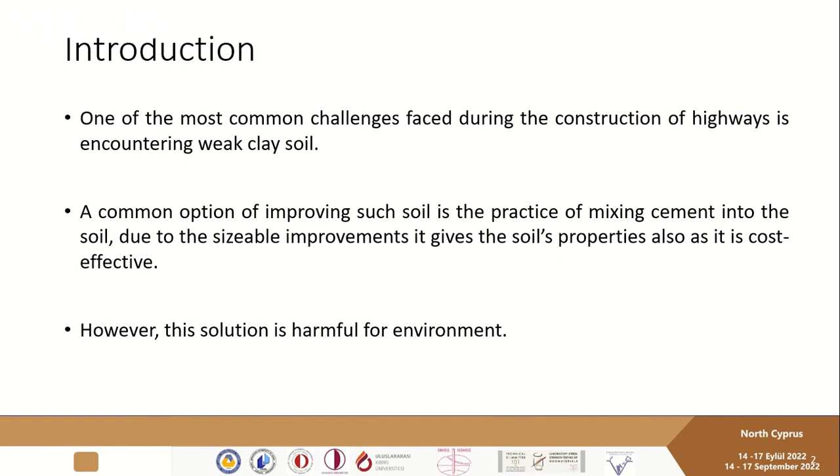However, this solution is considered harmful for the environment. Also, the most important issue that is usually forgotten is the durability of stabilized soil, where the stabilized soil gets subjected to a number of severe weather conditions throughout the seasons of the service years. These conditions may cause the stabilized soil to lose its strength.

Durability can be defined as the capability of a material to maintain stability and integrity over large periods of exposure to weathering.

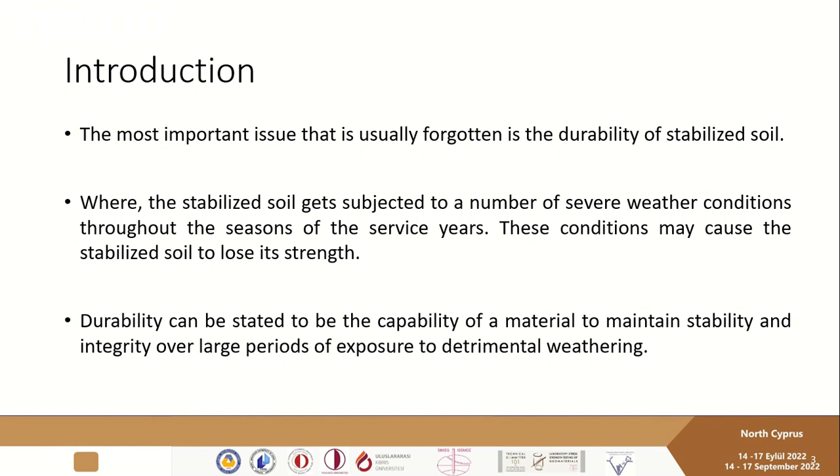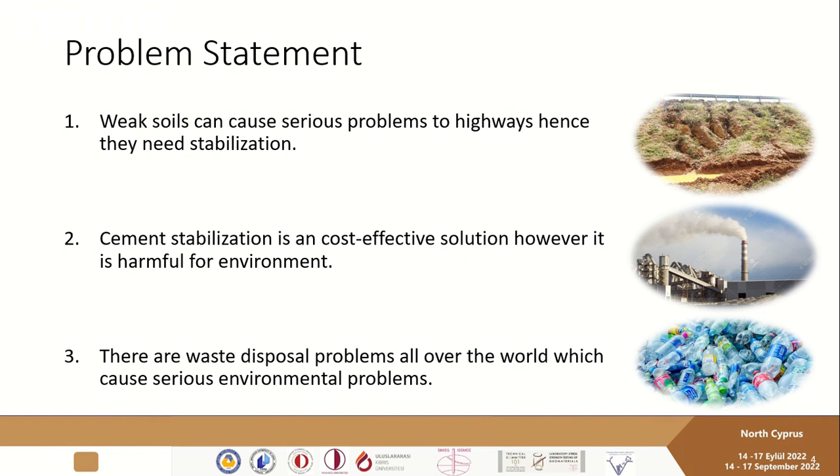So if we summarize the problems within this study, they can be as follows: weak soils can cause serious problems to highways, hence they need stabilization. Cement stabilization is a cost-effective solution, however, it is harmful for the environment. There are also waste disposal problems all over the world which cause serious environmental problems.

So the idea of this study was to combine between these problems, allowing for environmentally friendly solutions, and that is by adding PET shreds to cemented soil as a reinforcing material.

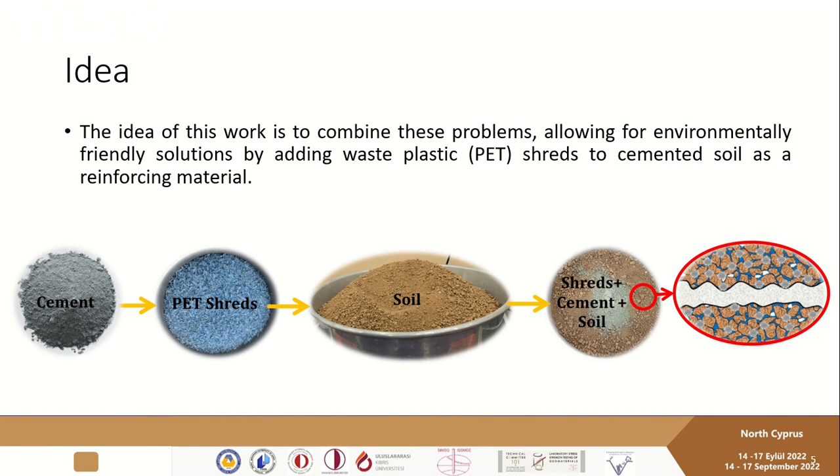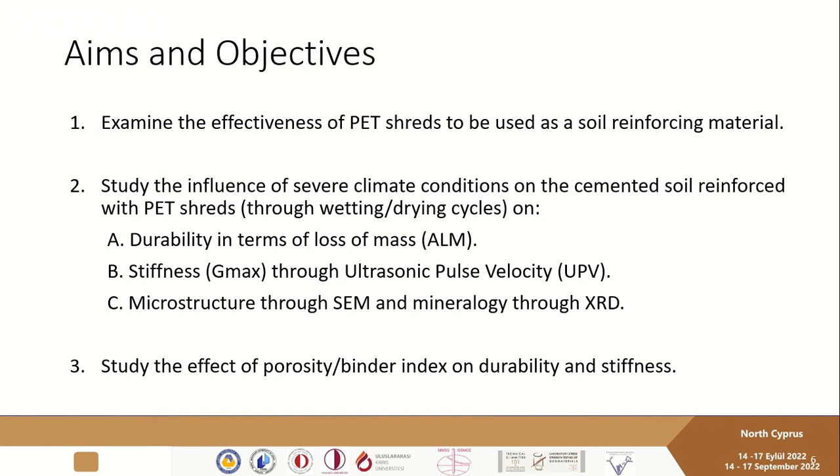The aims and objectives of this study were first to examine the effectiveness of PET shreds to be used as a soil reinforcing material, to study the influence of severe climate conditions on cemented soil reinforced with PET shreds through wetting and drying cycles on durability in terms of loss of mass, stiffness through UPV, microstructure through SEM, and mineralogy through XRD, and also to study the effect of porosity binder index on durability and stiffness.

If we come to the methodology that was followed to achieve these objectives, it was as follows: first, materials were collected. After collecting them, PET shreds were prepared and the materials collected were tested.

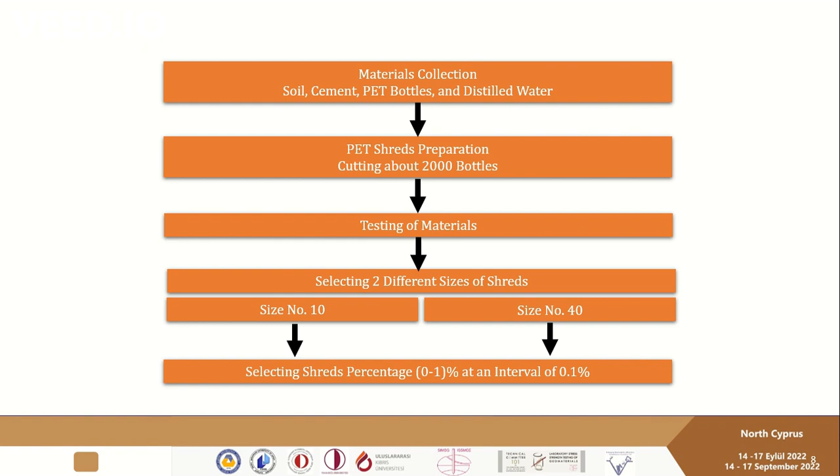After testing the materials, two different sizes of PET shreds were selected, size number 10 and size number 40. After that, the PET shreds percentage to be added to the soil was selected, ranging from 0 to 1 at an interval of 0.1%.

After that, CBR samples of soil with and without PET shreds were prepared, and then the CBR samples were tested to find the optimum PET shreds percentage range to be used to reinforce the cemented soil.

After that, three different percentages of cement were selected to be added to the soil, which were 5, 7, and 10. Then the CBR samples of cemented soil with and without PET shreds were prepared, and they were cured for 7 and 28 days.

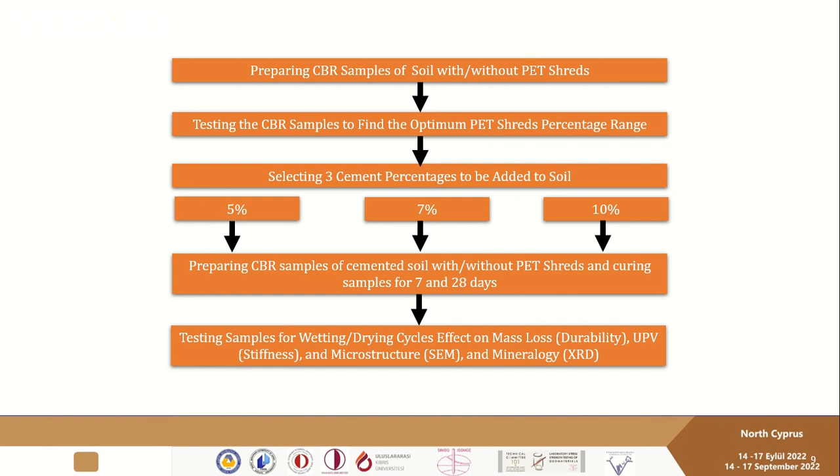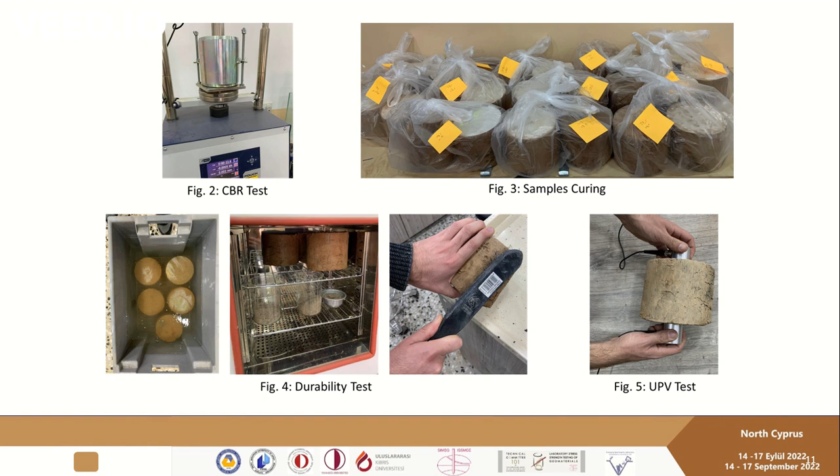If we come to the results, first of all, considering the effect of PET shreds addition to the CBR of the soil, we can see that by adding PET shreds, regarding the size and the amount added, the CBR was getting improved.

But size number 10 proved to be more effective in improving the CBR of the soil, and the optimum percentage of PET shreds was found to be 0.6, 0.7, and 0.8.

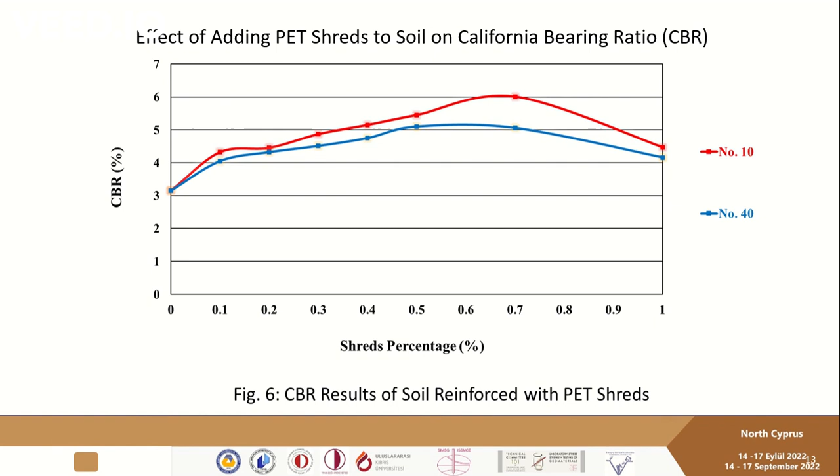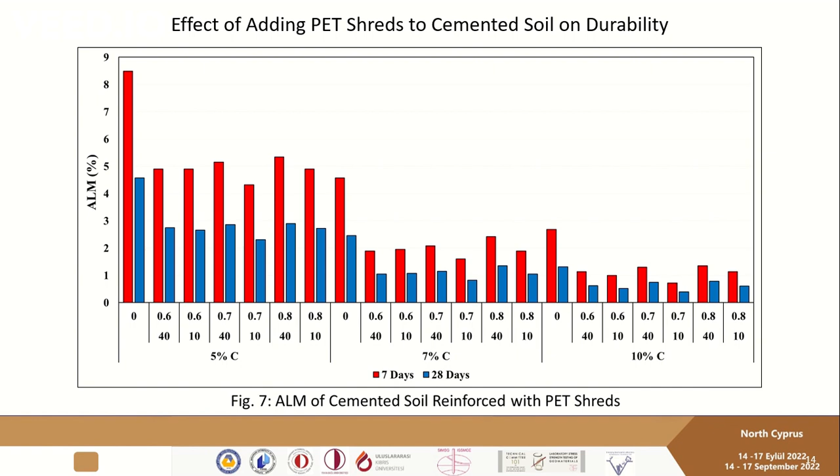If we consider the effect of adding PET shreds to cemented soil on durability, we can see that by adding PET shreds, the durability of the cemented soil was improved as the loss of mass was reduced. But size number 10 was better in improving the durability of the cemented soil, and also by adding a higher cement content, the durability was getting improved more and more.

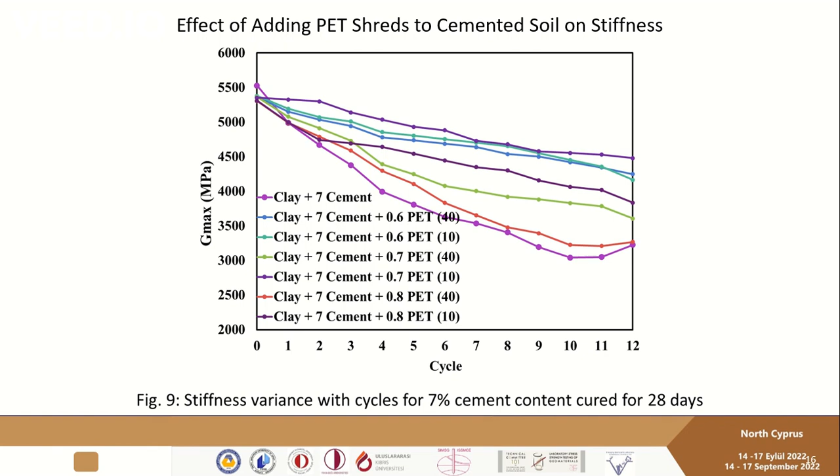However, the loss of stiffness was improved. It was reduced by adding PET shreds, which is a good thing.

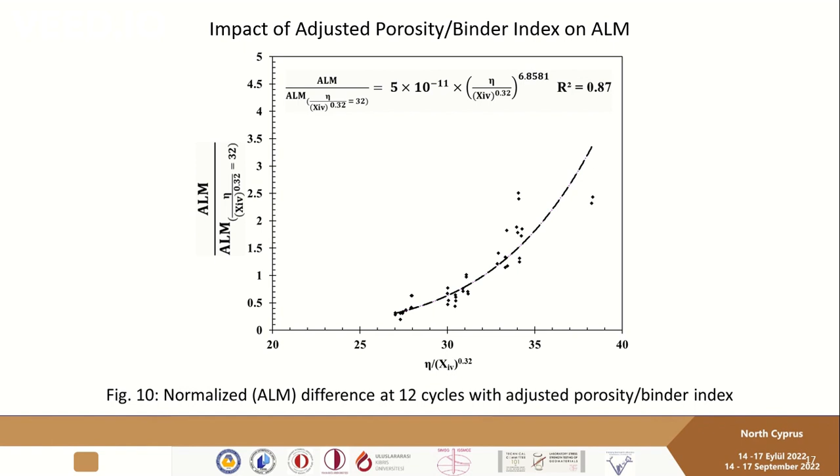Also, another important thing studied is the impact of the adjusted porosity binder index on loss of mass, where a relationship was found between this index and the loss of mass, and a high coefficient of determination was obtained. Also, the same story for stiffness, which is the maximum shear modulus.

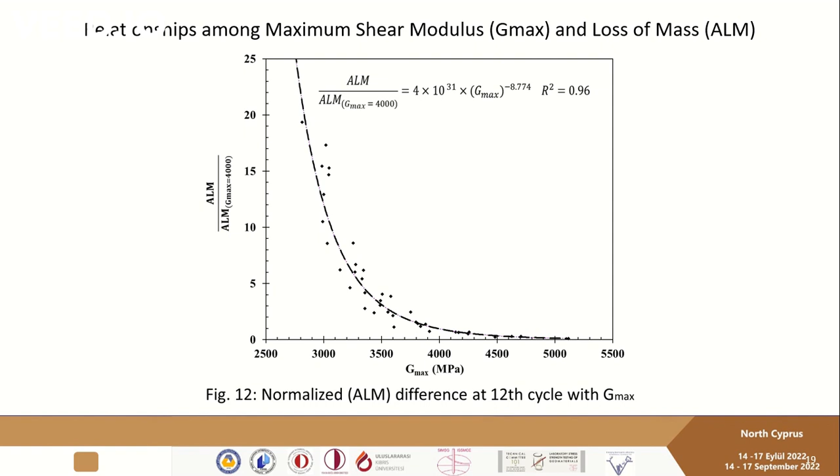Also, if we look at the relationships between shear modulus and loss of mass, we can see there is a relationship between them, and a high coefficient of determination was obtained. As the shear modulus increases, the loss of mass decreases too.

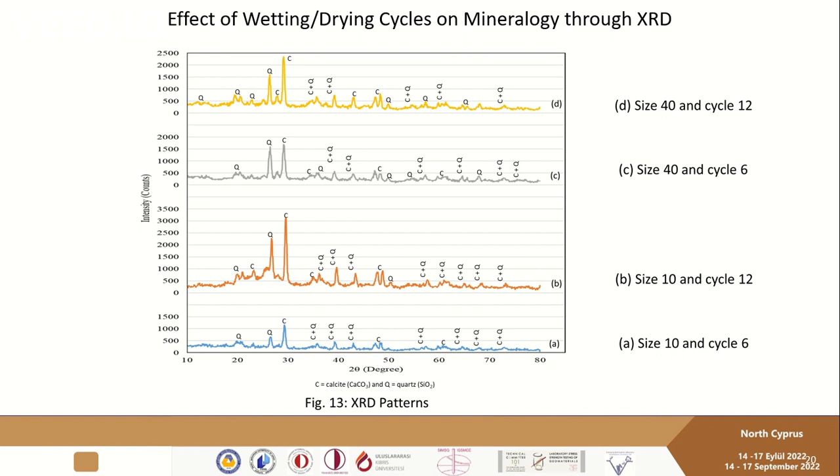Also, if we consider the effect of wetting-drying cycles on mineralogy through XRD, we can see that the main two peaks were quartz and calcite, and these peaks increased by subjecting the samples to more cycles. But these peaks were higher in the case of samples containing PET shreds of size number 10.

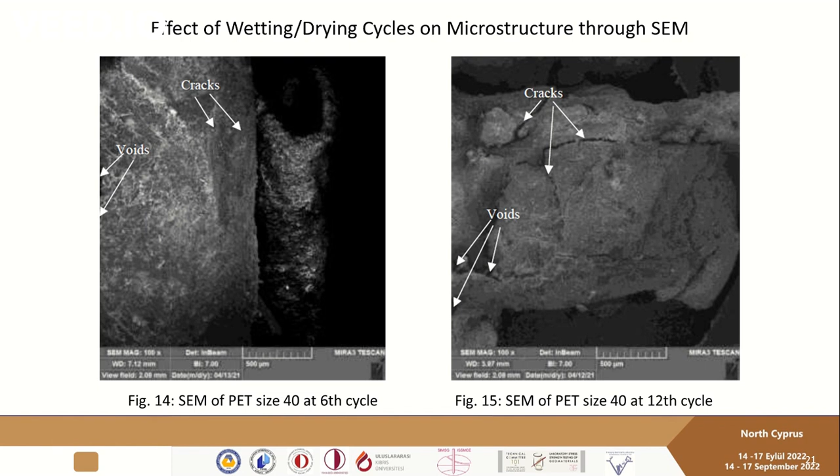Also, if we consider the effect of wetting-drying cycles on microstructure through SEM, we can see that the intensity and size of the cracks and voids increased by subjecting samples to more wetting-drying cycles. However, if we consider samples with PET shreds size number 10, we can see that the intensity and size of the cracks and voids was much lower than in the case of samples with PET shreds size number 40.

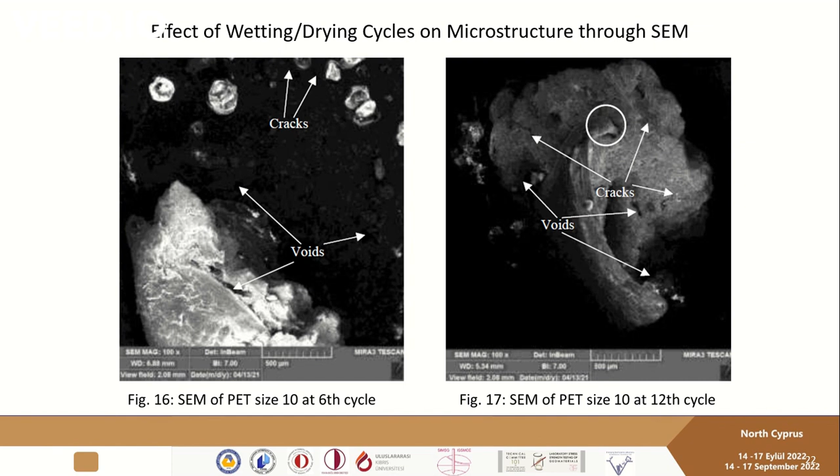So to come to the conclusion, we can see that the PET shreds addition to the soil improved the CBR by up to about 90% compared to plain soil, but size number 10 was better in improving the CBR of the soil than size number 40. Also, the optimum percentage of the used shreds was found to be 0.6, 0.7, and 0.8.

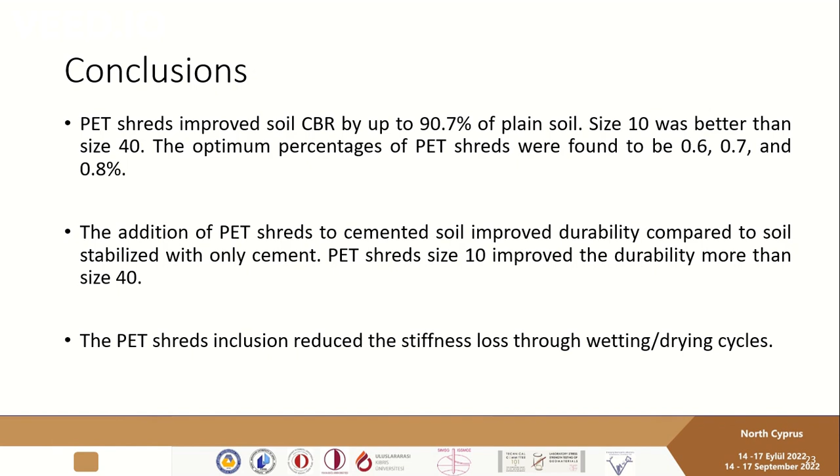Also, the addition of PET shreds to cemented soil improved the durability compared to soil stabilized with only cement, and size number 10 was better than size number 40. Also, the PET shreds inclusion reduced the stiffness loss through wetting-drying cycles.

Also, the usage of the porosity binder index for representing the performance of the mixes studied in this study was valid, and also the trial to correlate loss of mass and maximum shear modulus was proven to be valid.

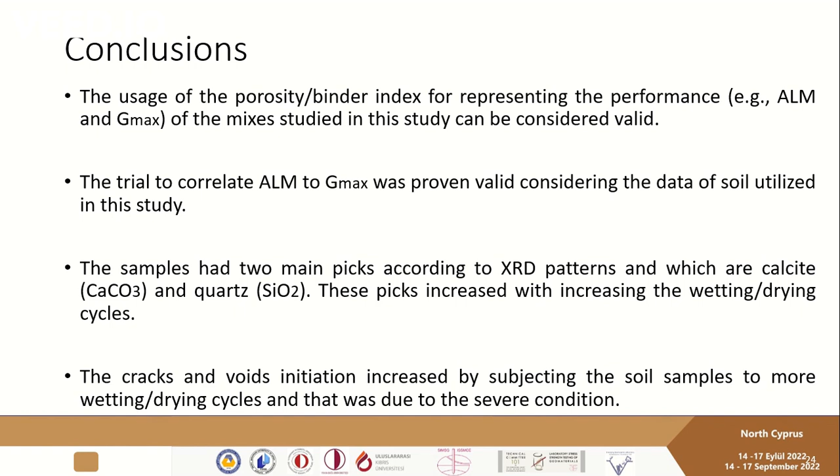And also, according to the XRD, the main peaks in the mixes were quartz and calcite, and these peaks increased by subjecting samples to more wetting-drying cycles. Also, the initiation of cracks and voids increased by subjecting the soil samples to more wetting-drying cycles, and that was of course due to the severe conditions.